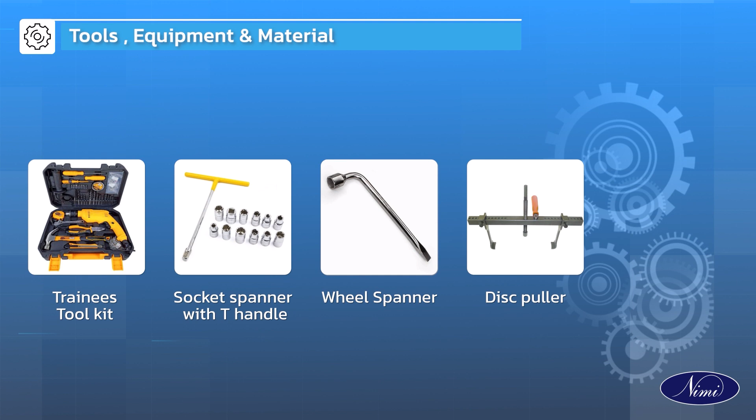Trainees Toolkit 1, Socket Spanner with T-handle 1, Wheel Spanner 1, Disc Puller 1, Micrometer or Vernier Caliper 1, Dial Gauge 1, Jack and Horse Stand 1, Air Compressor 1,

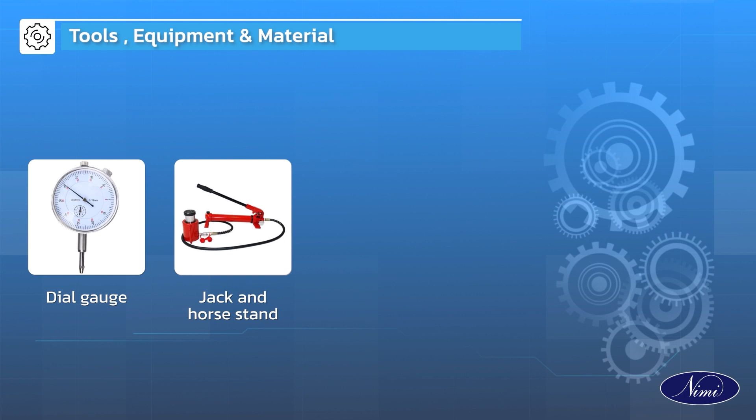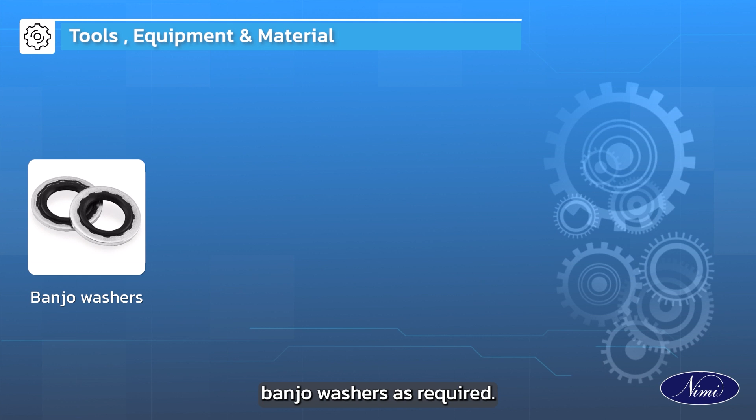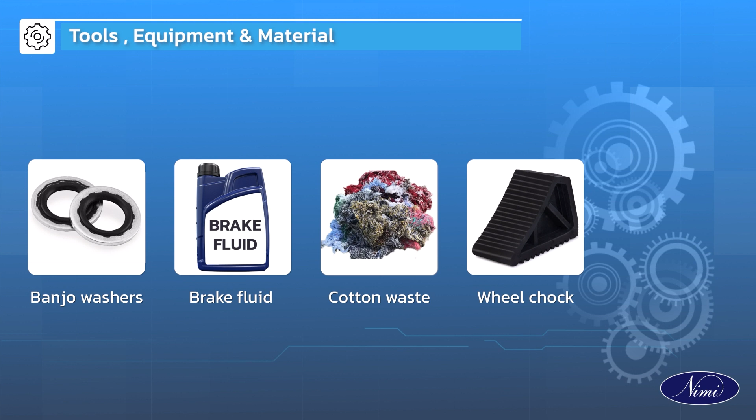Cotter Pin 1, Piston Seal 1, Banjo washers as required, brake fluid as required, cotton waste as required, wheel chock 1 set, and emery paper as required.

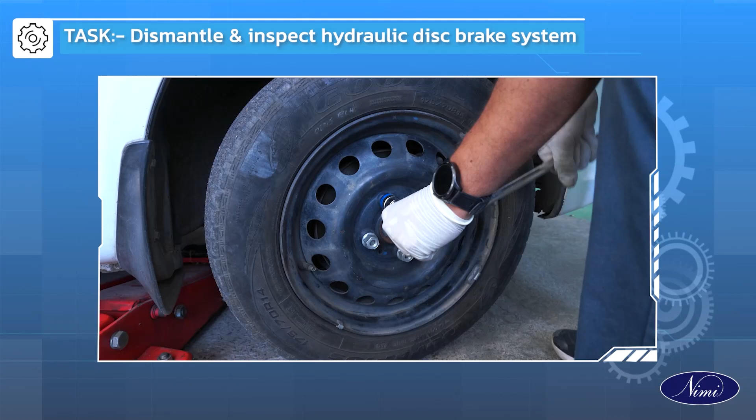Dismantling the hydraulic disc brakes. Chock the wheels and loosen the wheel nut. Jack up the vehicle and support with the horse stand. Remove the wheel.

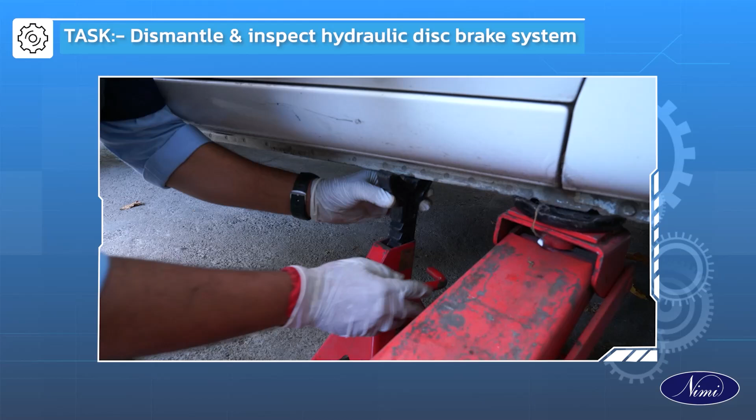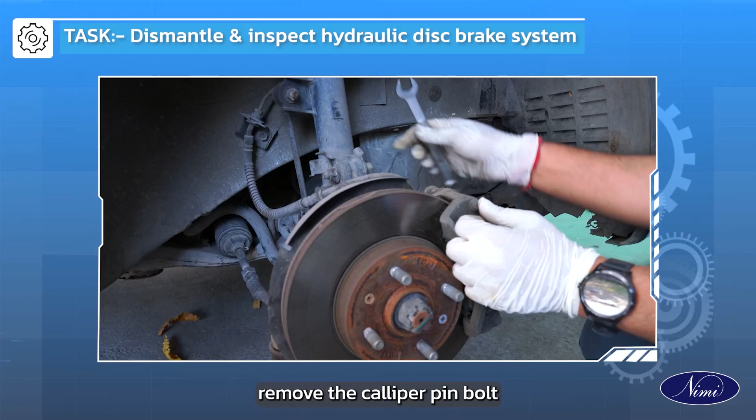Remove the caliper pin bolt, dust boots, cylinder slide bush, carrier bolt, disc brake caliper and carrier. Remove the disc brake pad, calipers, dust cap and bleeder screw. Disconnect the brake pipeline. Remove the cylinder boot, circlip, piston and piston seal.

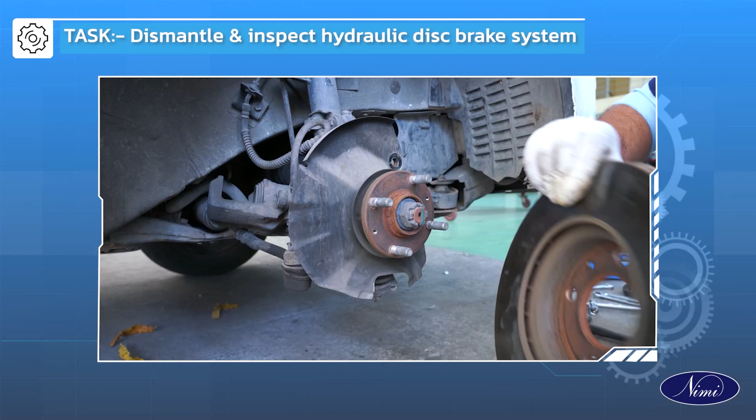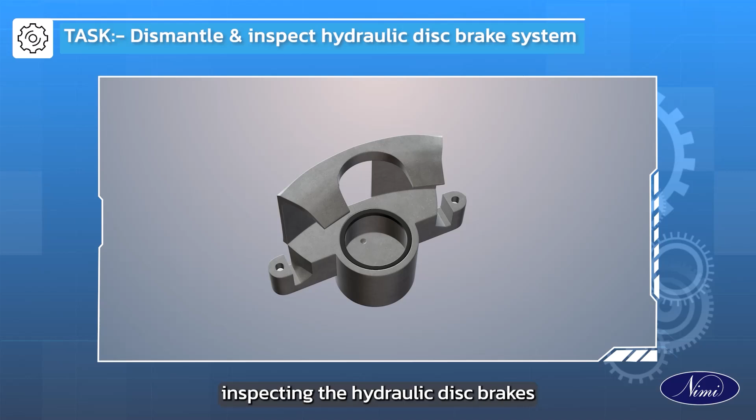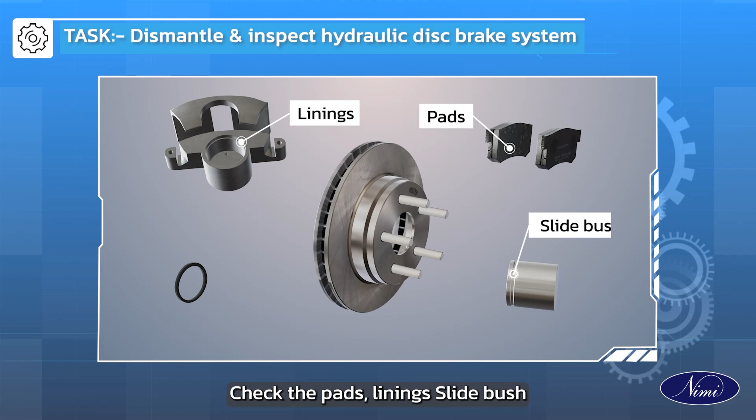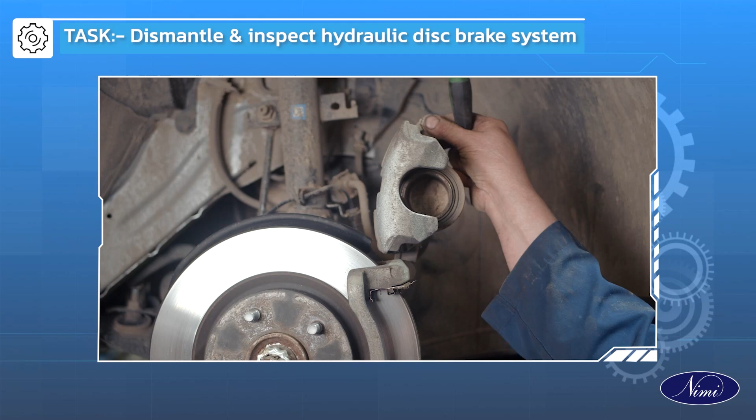Inspecting the hydraulic disc brakes. Clean all the metal parts in kerosene. Check the pads, linings, slide bush, piston seal and disc. Replace parts if damaged.

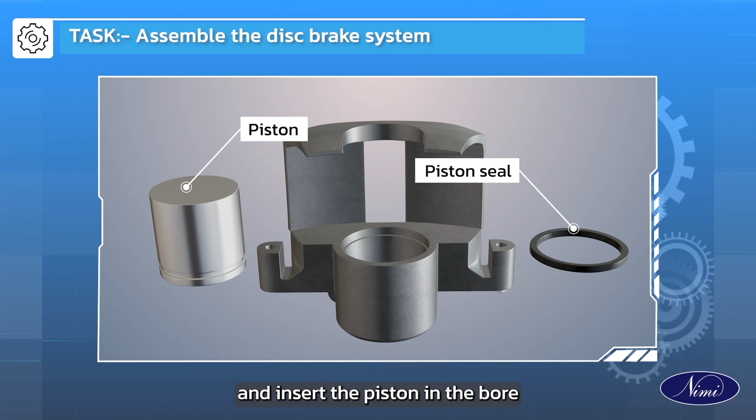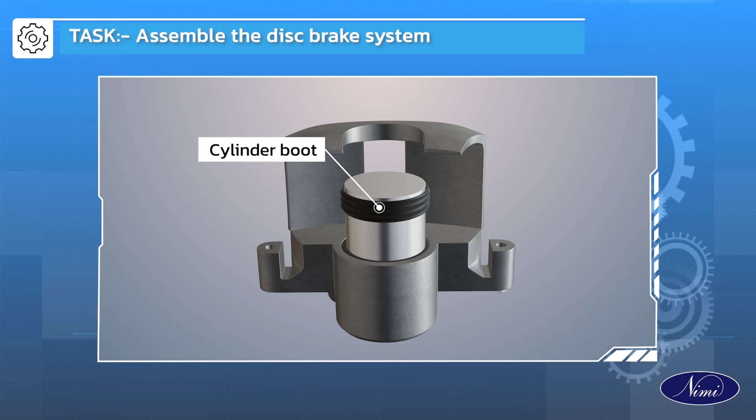Assembling the hydraulic disc brakes. Fix the piston seal and insert the piston in the bore. Fix the cylinder boot, bleeder screw and bleeder dust cap. Insert the brake pads.

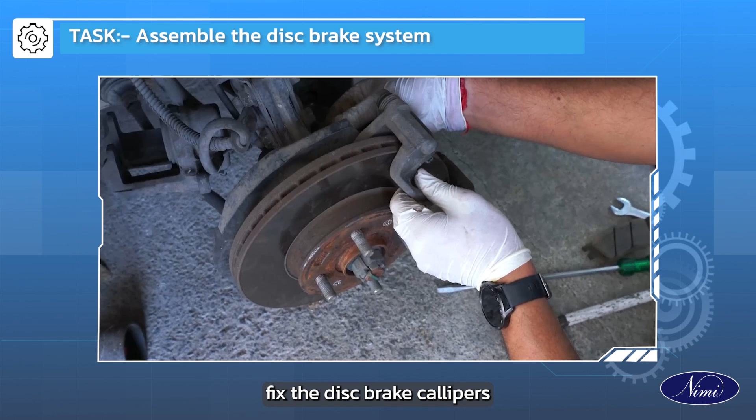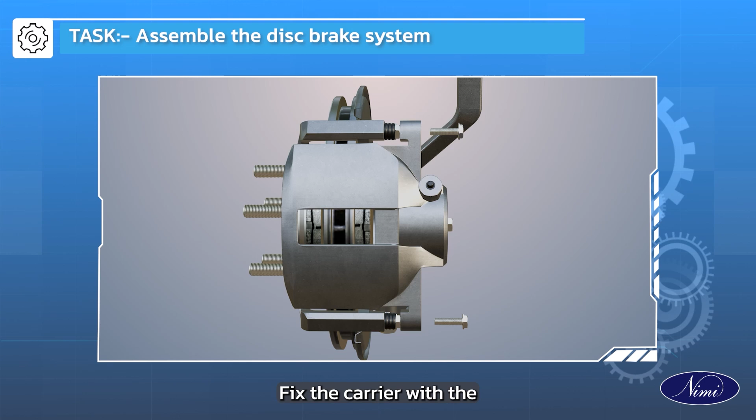Fix the disc brake calipers on the carrier and align with the bush hole. Fix the slide bush, dust boots, caliper pin bolt, carrier with the caliper unit. Fix the carrier with the caliper holder and tighten it.

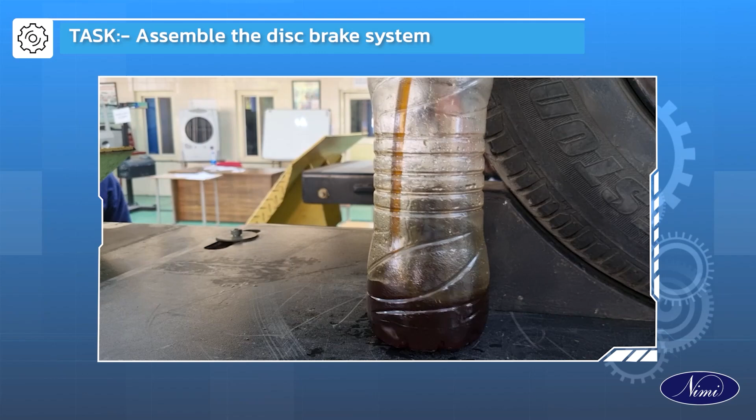Connect the brake fluid and fill. Bleed the system. Adjust and test the pedal free play and check the brake performance.

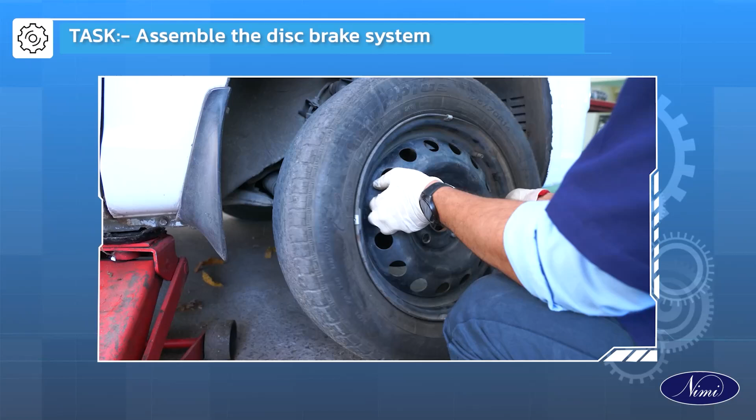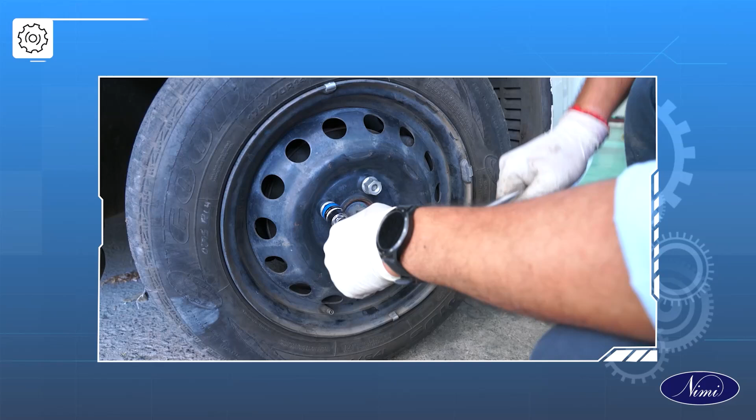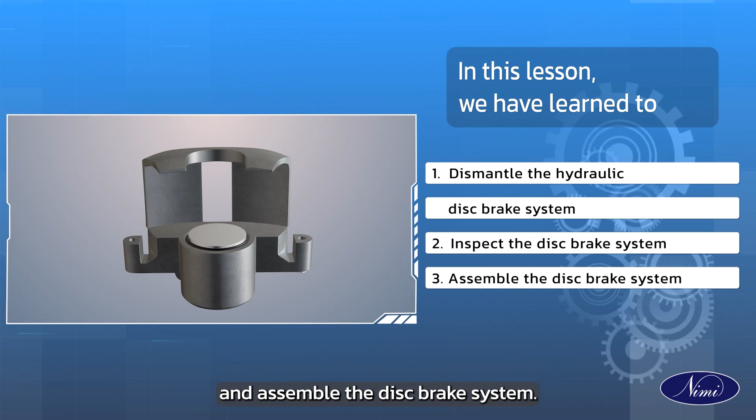In this lesson, we have learned to dismantle the hydraulic disc brake system, inspect the disc brake system and assemble the disc brake system. Hope you have a clear understanding of this session.